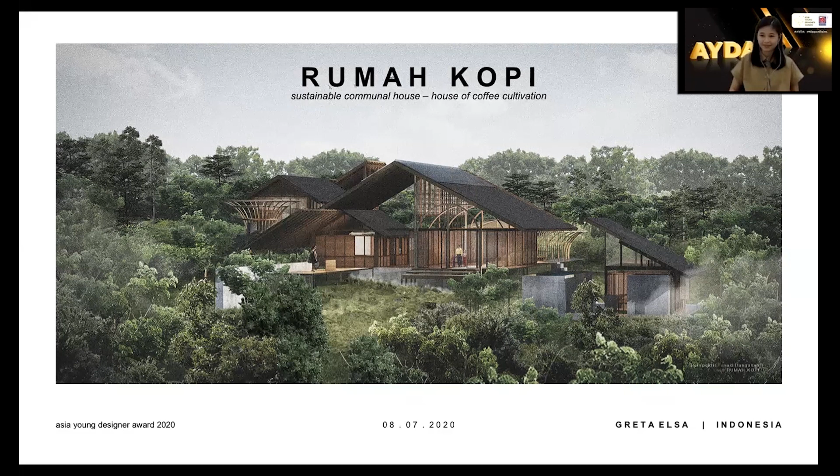My country has the largest archipelago, where productivity, logistical inequality, and inequity has been a massive issue in a lot of remote areas. As designers, I'd like to believe we're all addicted to coffee, and what I'm about to share today is the story of the best local coffee I've ever had, and the people who've been working on it.

Last year, I was invited to visit a secluded village, Kampung Bunikasi, by Doni and Sigit, two individuals with prior knowledge of the area. With only 35 families and little to no electricity, they've been surviving self-sufficiently through organic agriculture.

They have this expanse of coffee plantations that I found as I walked through the village. As I came to realize its tremendous potential, I also realized the gap in logistics and infrastructure that prevents them from cultivating the coffee fruit efficiently.

This gap inspired me to develop a concept of a communal house with a noble objective: to bring up productivity on the local product without ruling out its local value. Thus, I proclaim this communal house as Rumah Kopi.

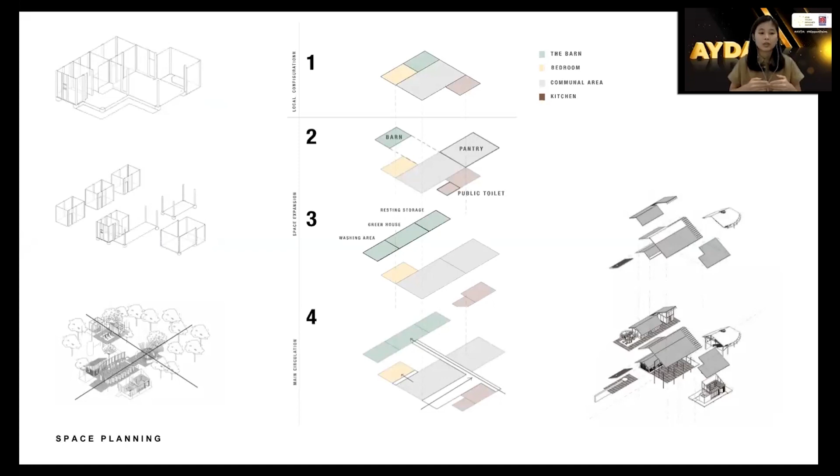Inspired by the local house, I adopt the local structure and its organization into my design. I did some expansion from the module of a local house by stretching out both floor and roof elements, creating such void within the space with the idea of creating a natural interior environment.

Regarding the material, the local house is known for its traditional bamboo woven wall. However, it is not as popular as before, as the younger generation feels it looks ancient. So, in hopes of sustaining local craftsmanship, I designed a new bamboo element with 3 modifications.

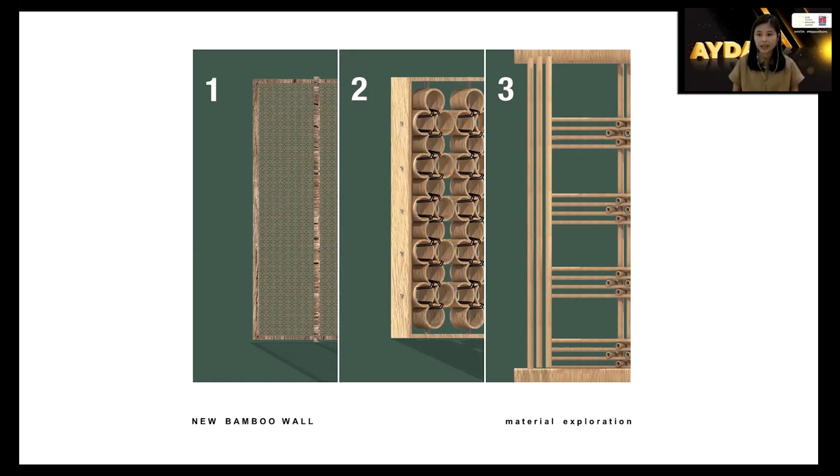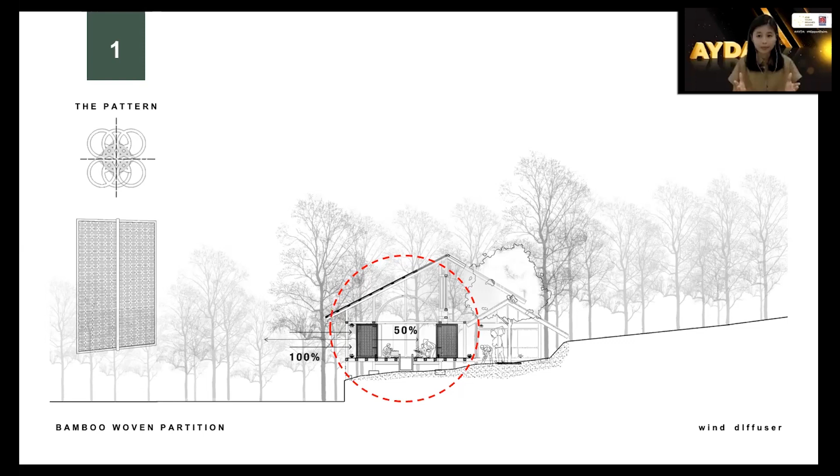The first is the bamboo woven partition. The hollow part which forms the pattern will allow sunlight to enlighten and warm the interior space. And if we set the partition at 45 degrees southeast, it will help direct wind into the greenhouse.

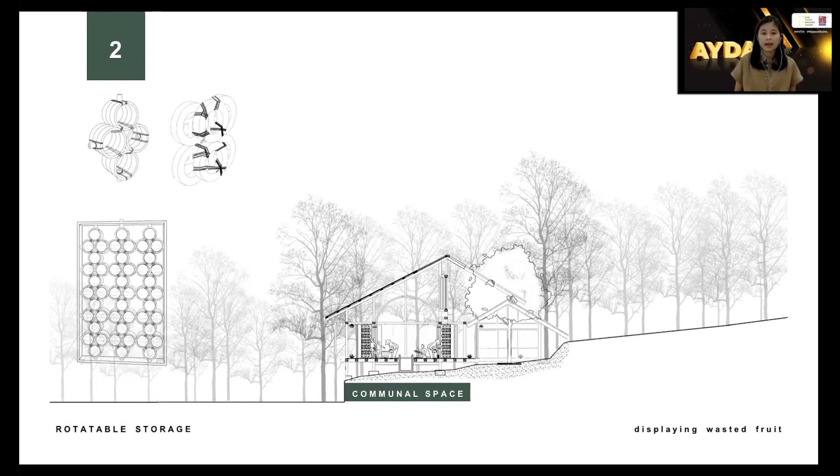The second is the rotatable storage, made of stacked cross sections of bamboo and connected with a bamboo dowel. And the last is the space divider, constructed by bars of bamboo with an anchor structure to attain maximum flexibility.

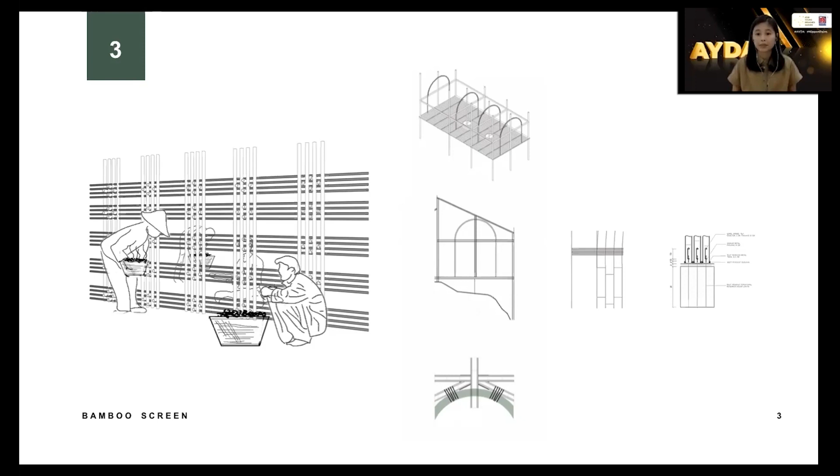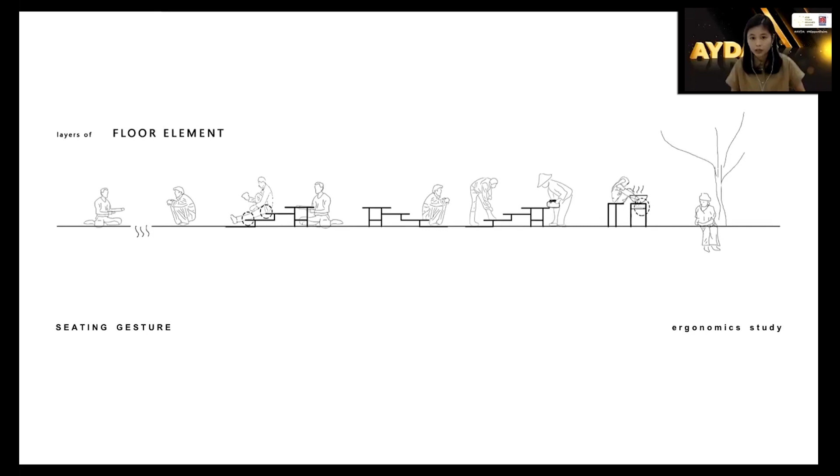While observing the local gesture, I concluded that sitting on the floor is the indigenous way of showing modesty. So I decided to design a furnitureless house by integrating the floor element into sitting pads and working bases, where levels grow up from the floor and are formed to surround the stove.

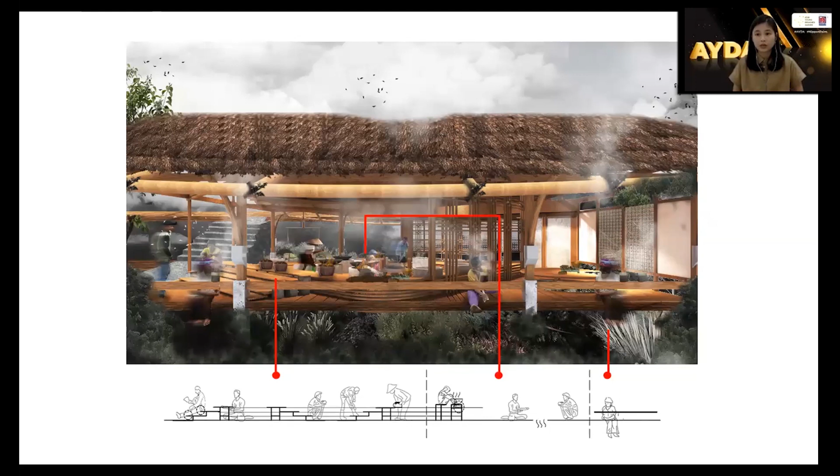In respect of local beliefs of not taking nature for granted, this is a low energy building with an effective airflow recycling system and maximum natural light exposure. I also adopted the traditional heater within the floor slab.

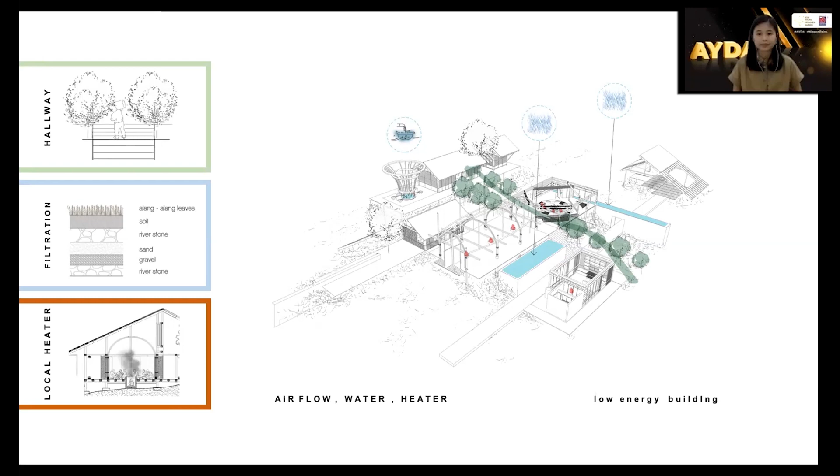If everything happens as I planned, I believe this design will continue to sustain them in terms of their social and culture, their environment, and also level up their economic value at the same time.

So now I would like to invite you all to walk through the design.

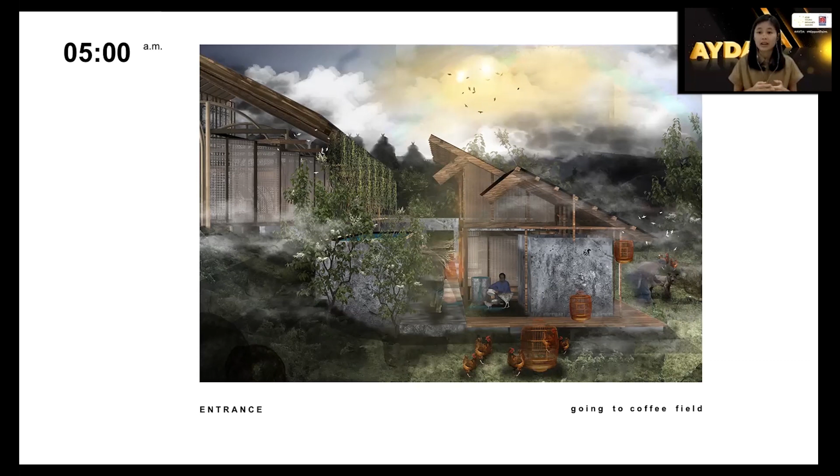It's 5 in the morning. The rooster crows as we begin the day working on coffee plantations. Blue skies hover above on our way to the communal space.

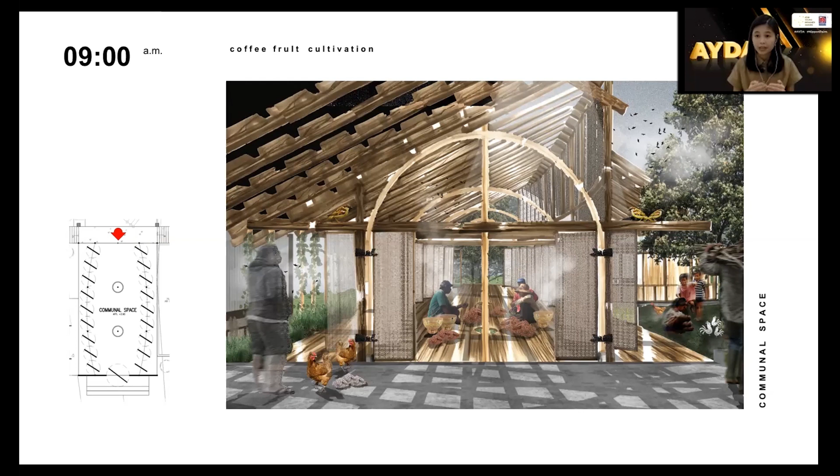The seniors have already gathered inside, carefully sorting each coffee fruit. The poor quality ones are collected and given to the children, who then transform them into decorative plants and put them on the rotatable storage.

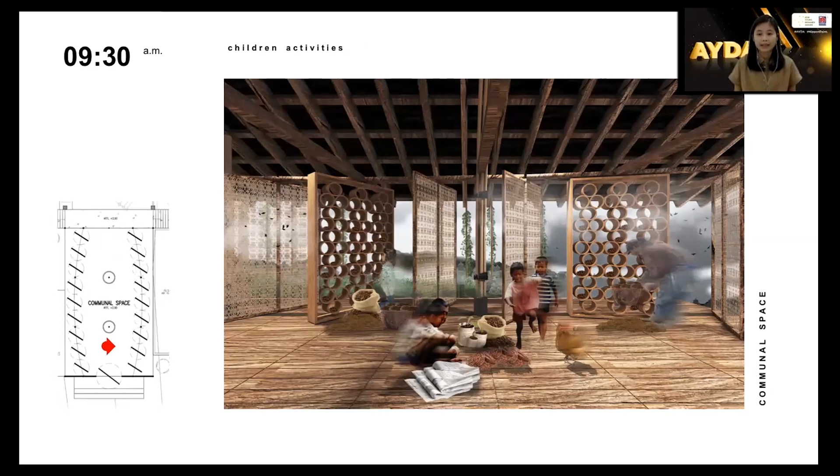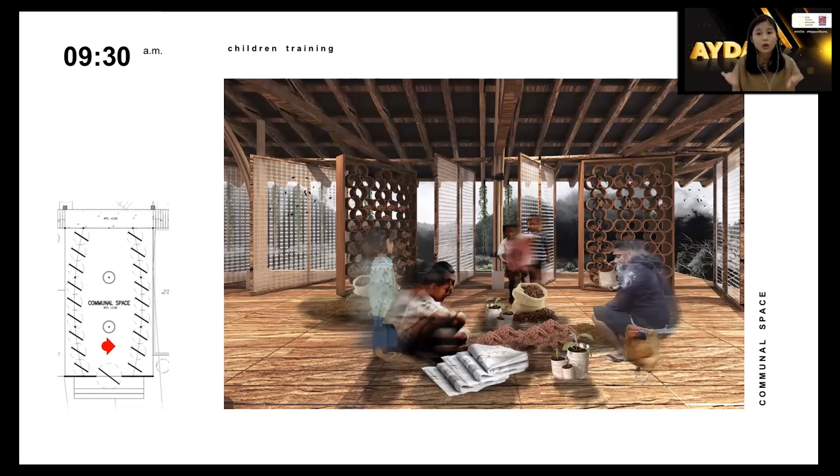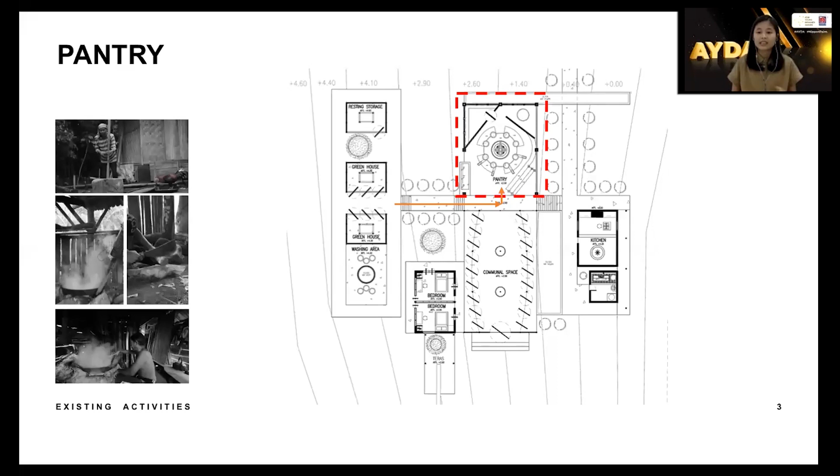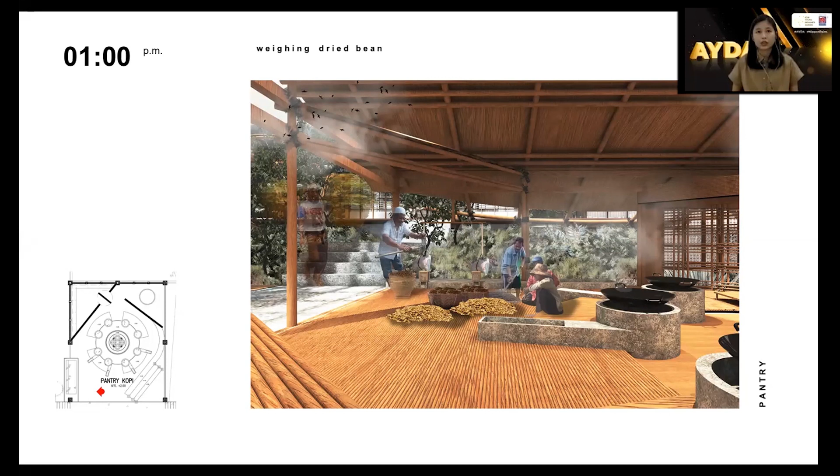As lunchtime passes, preparations continue at the pantry. We begin weighing the raw coffee beans, putting them into baskets to be cooked the traditional way. And with one foot resting upon a concrete block, we begin stirring the raw coffee beans with a large spatula.

And look at that white smoke. It signals a completion of the roasting process, and the roasted bean can now be set aside on the floor steps.

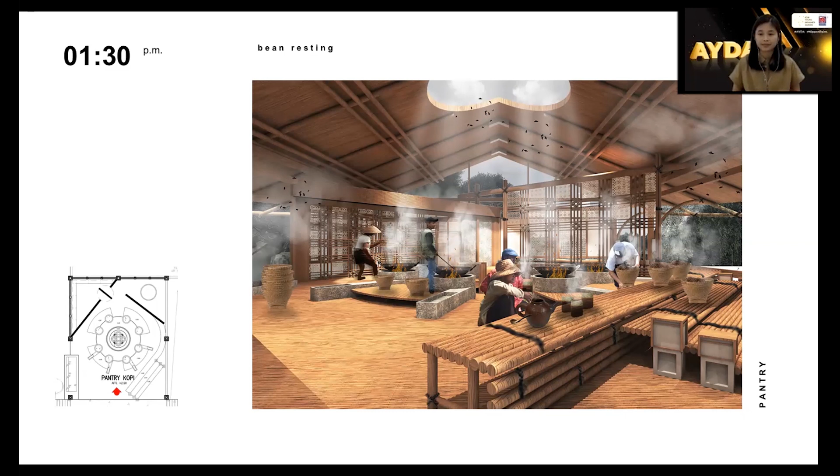While waiting for it to cool down, the locals sit on the floor, chatting while listening to the workshop being hosted by Donnie and Sigit.

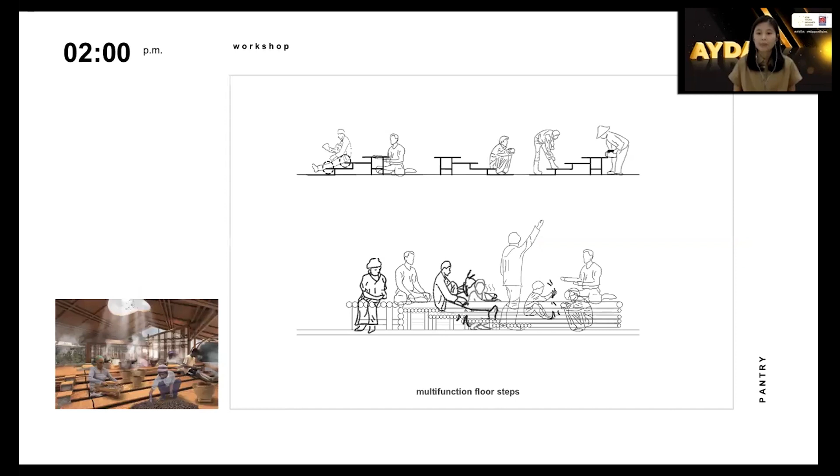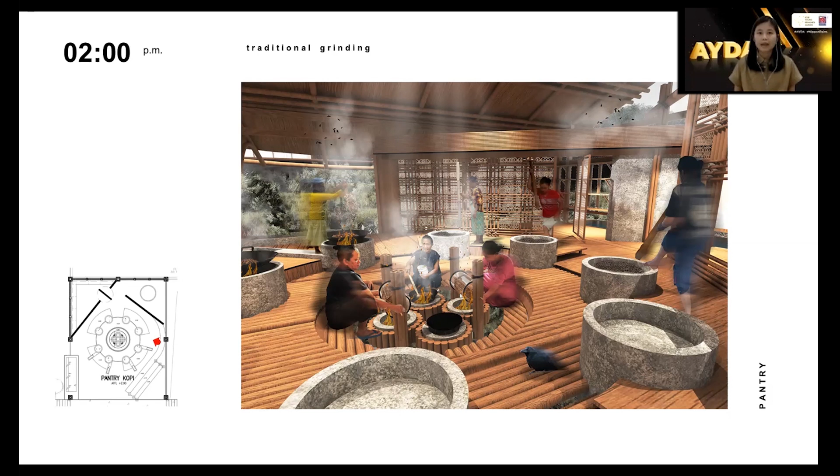Once the beans are ready, the women then grind it down into coffee powder with their mortar and pestles. The coffee is now ready to be packaged, and let's turn our attention to the large hole under the table. The hole is ergonomically designed to support the sitting position of the locals who would have to work on this process for a long period of time.

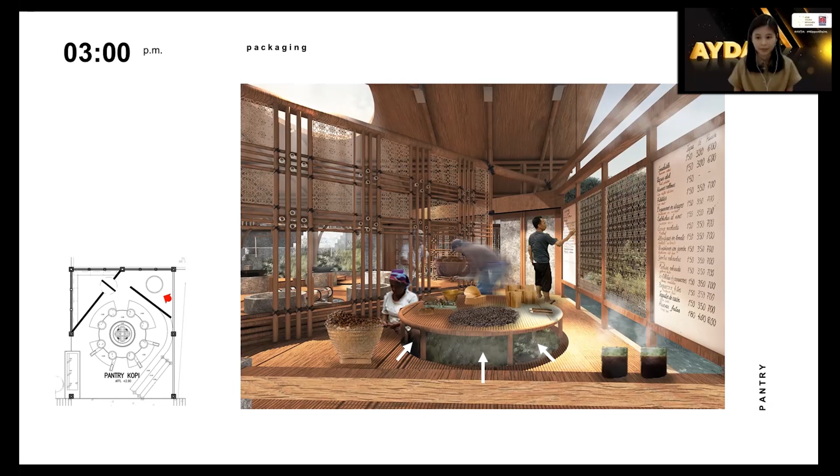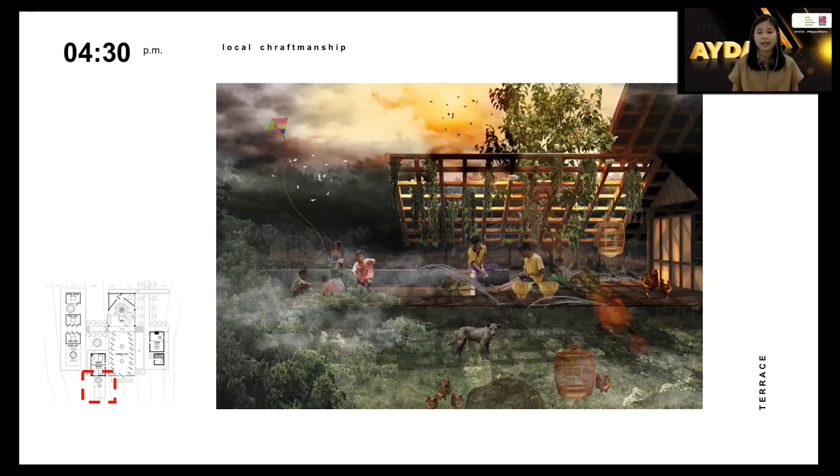The processing of coffee beans is complete. The locals now enjoy their evening working on bamboo woven crafts. And as the sun sets upon them, Donnie and Sigit head to the kitchen.

Resolving the existing problem, the open roof structure and the rotatable partitions are designed to support cross ventilation.

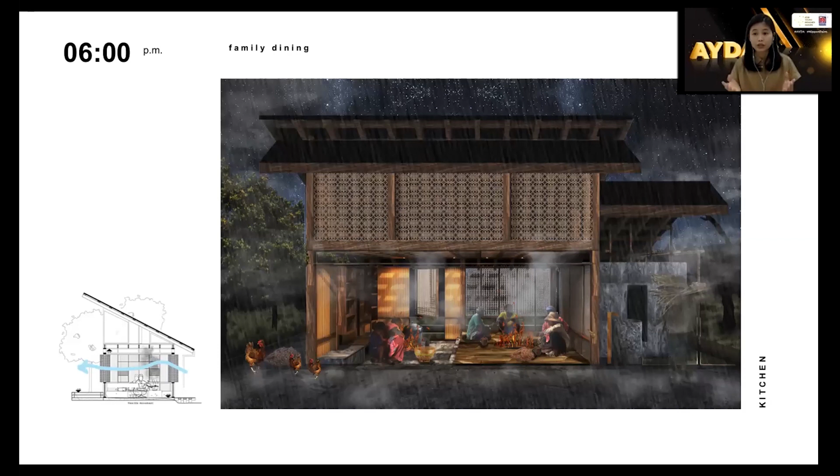As they are going to end the day, a bonfire fills the communal space with a family-like warmth, as the people have discussions over cups of coffee.

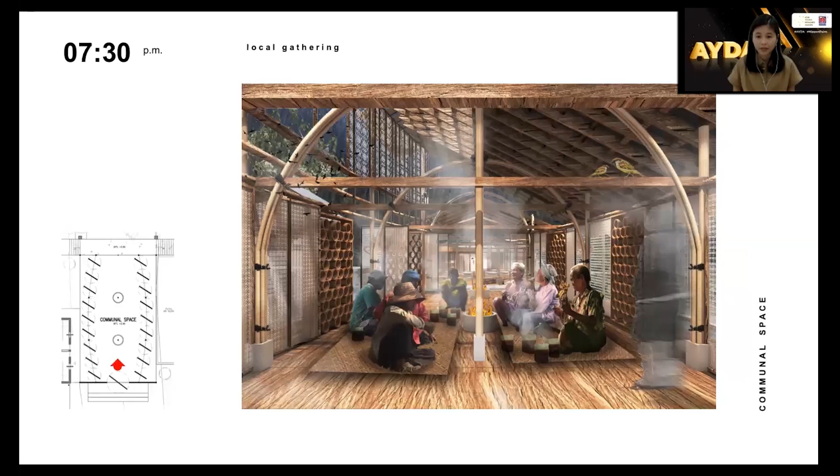It is finally the dream of Donnie and Sigit to dwell into Kampung Bumi Kasih, to lay down on the modesty of local texture, and to be rested on the sound of nature.

And if you're looking at the bigger picture, the combination of local material and sustainable material will elevate bamboo, putting them on a higher level.

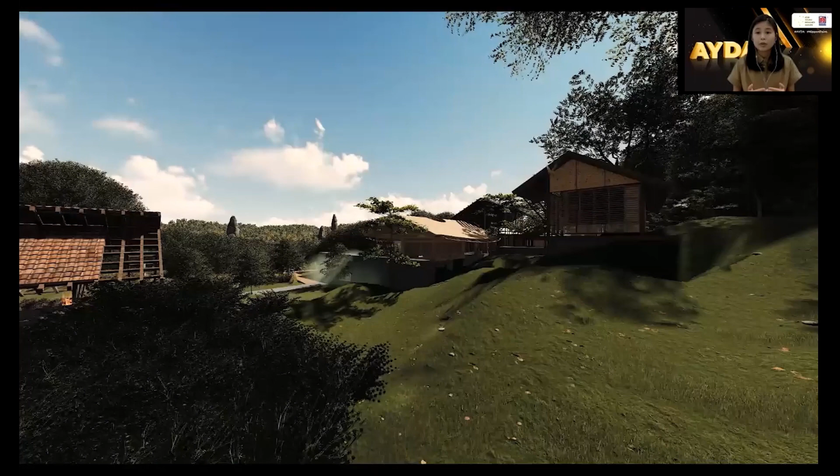This project is also in line with the vision of the Indonesian government, who has lately been encouraging local products to thrive through community empowerment. I believe it is our responsibility as designers to take part in it.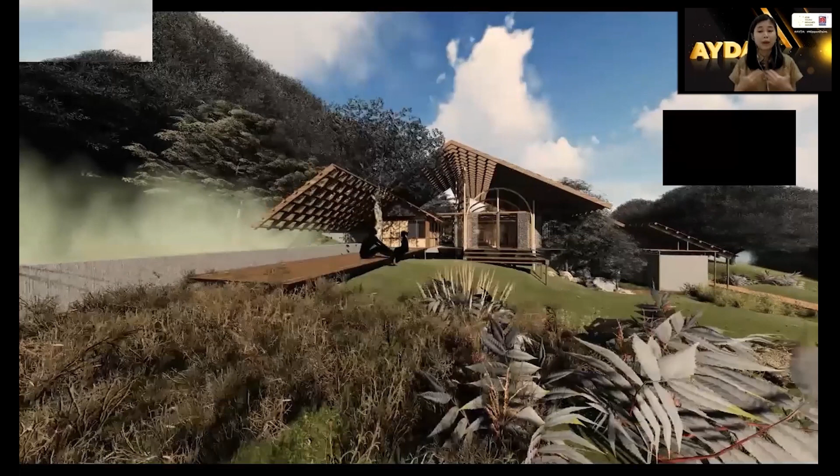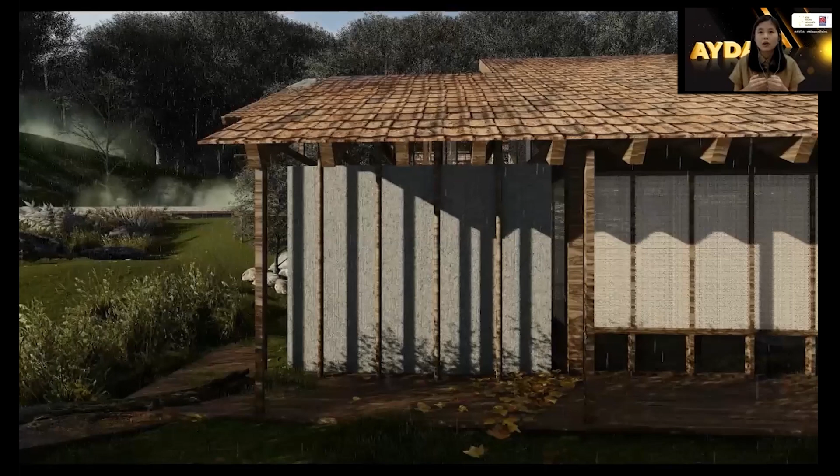More than just building facilities, Rumah Kopi happens to be an investment, a forward step, a milestone in developing over 74,000 villages in our country for a sustainable future. I believe from now on, they will be excellent at developing their own farming products.

Every now and then, every single sip of coffee reminds me of the subtlety of tradition, the blood and sweat, the passion and sincerity of our coffee farmers that has been put into what we consider just a morning routine.